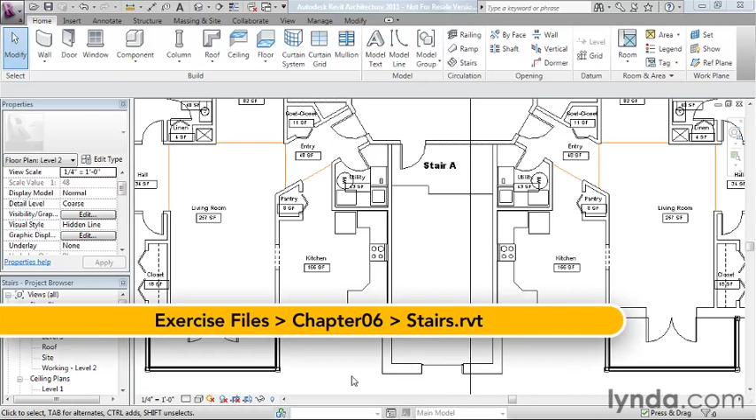Stairs are among the more complex of our sketch-based objects. You sketch a plan representation of the stair, and from that sketch, Revit builds all the model geometry necessary. The sketch lines are color-coded to indicate their different functions. So the riser lines are black, the boundaries are green, which indicate the edges of the stair and also indicate any stringers you might have, and there's a blue line that indicates the path of the stair.

With the Run tool on the ribbon, you can quickly draw all of these elements with just a few clicks. Sometimes stairs can be a little tricky, but with a little practice, you'll get the hang of it. So here I am in a version of the condo file. The file's called simply Stairs in the exercise files folder.

And we're going to go ahead on the Home tab and on the Circulation panel, click the Stairs tool. This will take us to sketch mode. We'll see a lot of familiar tools and a few that are unique to the stair. Now the first thing I'd like to point out is stairs have fewer shapes. We either draw them as straight or curved, and you'd use curve if you're doing like a spiral stair or something along those lines. And we're going to stick with straight stairs in this case.

Now I'm going to do a pretty typical switchback stair here in the stair tower. So it's going to go up half the risers, and then it's going to turn with a landing and go up the rest. Before I start clicking and sketching, when you're working with stairs, it's very important that you check the properties first. Now the first properties we want to talk about are the levels. And I want to just verify that I'm starting at level 2 and I'm going up to level 3.

And the reason this is important is if I click the Edit Type button right here and scroll down, the type in this case is called 7-inch maximum riser 11-inch tread. And what that means is exactly what you see here. The minimum tread depth of this stair is 11 inches. The maximum riser height is 7 inches. So we can do a smaller riser and we can do a bigger tread, but we can't exceed these two limits.

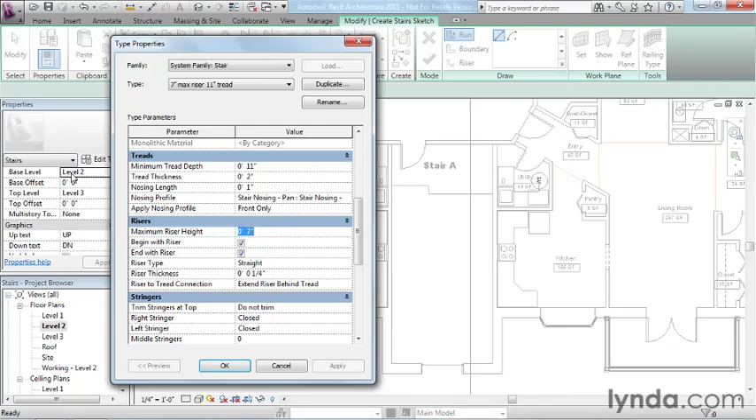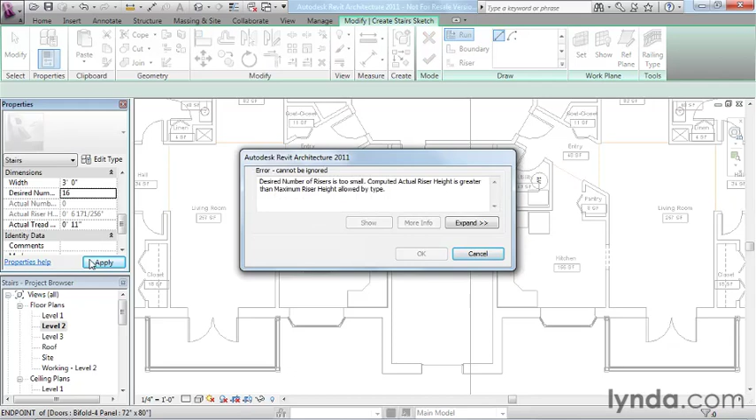So Revit's going to take this number here, this 7 inches, and it's going to look at the distance between these two levels, and it's going to figure out how many risers we need. And that's going to be controlled down here. So if we want to try a different number of risers, we can do that. Like I could put in 16, for example, but if I try to use that number, Revit will complain and give me an error message. It violates the rules, basically, that I just showed you. It doesn't work with a maximum 7-inch riser.

So 18 is basically the limit. And as you can see here, that gives me an actual riser height of nearly 7 inches. That's as close to 7 inches as you're going to get without going over. Now, the other thing I want to look at here is the overall width of the stair. I actually want my stair to be a little wider than the default 3 feet, so I'm going to increase that to 4 feet. And again, you can edit that later, but it's easier to just do it ahead of time.

Now, the next thing is I don't typically try to draw my stair in exactly the right location. What I typically do is just kind of click in a convenient open space and start drawing. And what I would like to point out to you here is it's a little difficult to see, but there's this gray piece of text following my cursor. And right now it says 11 risers created, 7 remaining, and then it says 12, and then 13, and so on. This is telling you how many risers you have.

So what I want to do here in this case, because I'm doing a switchback stair, is I'm actually going to back up here to where it says 9 risers, because I know I've got 18 total. So I want to use up half the risers for the first run of my stair, and then I'm going to click my mouse. Now, I mentioned the color coding. You can see it here. The green lines are your boundary. The blue line is your path, and these black lines are the risers themselves. Now, let me zoom in just a little bit closer.

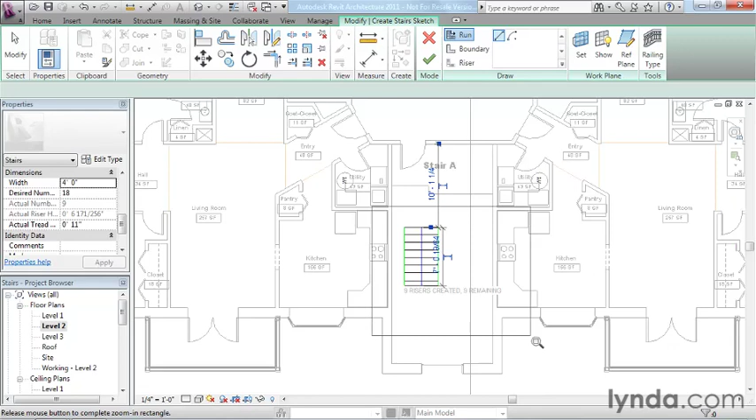And to create a landing, we don't actually draw the landing. Revit will do that for us. All we need to do is indicate where we want the next run of the stairs to start. So I'm going to kind of come over here and click. And then you'll see the little message telling me how many risers I have left.

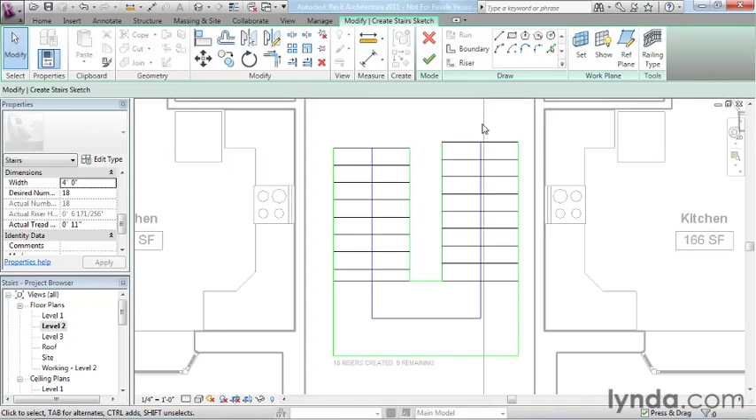As soon as I click past that rectangle, you can see that I've used up all 18 risers and there are 0 remaining. And I'm going to click again. And not only do I get the rest of that run of stairs, but Revit also goes ahead and fills in a landing for me. Now you can make some modifications to this sketch after the fact. I'm going to zoom back out.

The most obvious modification that we want to do is actually relocate it because it's just sort of floating in space right now. So the easiest way to do that is just kind of move it around. So I'm going to select the entire sketch with a window, click the Move tool, pick the endpoint snap right here, and snap that right to that endpoint there. So that'll kind of get me started in the right location.

But the next thing I want to do is I only want to move this half of the stair. So I'm going to make another window selection like so to highlight just that half of the stair. And that's all I want to move. Now I could use the Move tool again for this, but I actually don't want to snap it right to any geometry that I have conveniently nearby. I want it to be an offset off of this wall.

Now, I could do that really easily if I had some temporary dimensions, but they're not displaying. Turns out that we've got this button right here where we can force the temporary dimensions to display simply by clicking on that button. And now I have all the dimensions I could need to go in and tell it exactly where I want these sketch lines to move over to. So I'm going to edit that value right there, and I'm going to make this 4 inches. And that's going to pull everything over there and basically lengthen the landing.

One last modification if I want is I could make the landing a little deeper. And again, you'll see that that's perfectly fine. So whatever modifications that you need to do. Before I get out of here, I just want to verify Revit will create railings for us automatically as a convenience. It's not required, but it does it.

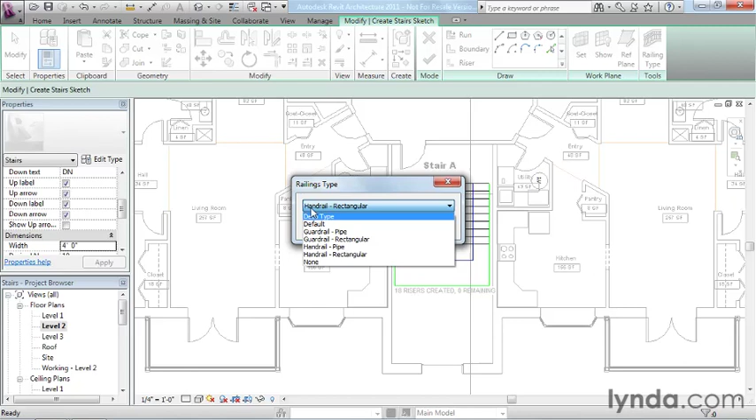I'm going to click the railing type and just verify the type of railing I have. You might have several choices, so you want to kind of choose the one that you want. And I'm going to stick with the default rectangular handrail. And then I'm going to go ahead and click finish. And what you'll see is we've created the stair.

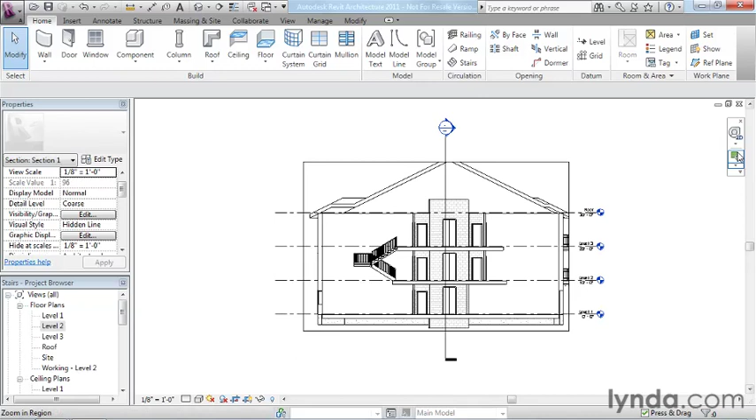And not only that, but it's given us some railings on each side of the stair and drawn it there in plan. Let's take a look at it in section. You can see it there in our section. And now we could mirror and copy that around elsewhere in the file. So there you have your stair, complete with railings.

You can repeat the same process to create other stairs, like for example down here in the main lobby, we can do a straight run stair running up there. All you need to do in that is just use the run tool, click, and use up all 18 risers in 2 clicks. And for other floors where you have the switchback stair, you could just simply copy the one we have around. Okay, so in this lobby here, I might want just a simple straight run stair.

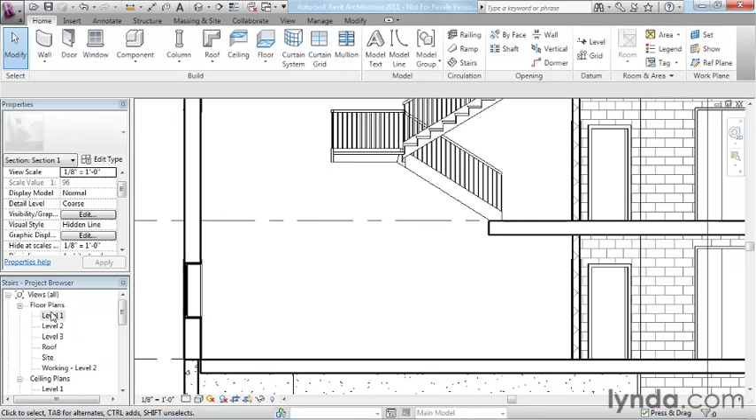I'm going to return to level 1 here in the lobby. And the stair should remember most of the settings that I already had configured. So we'll just verify that. We're going up from level 1 to level 2. It's 4 feet, it's 18 risers.

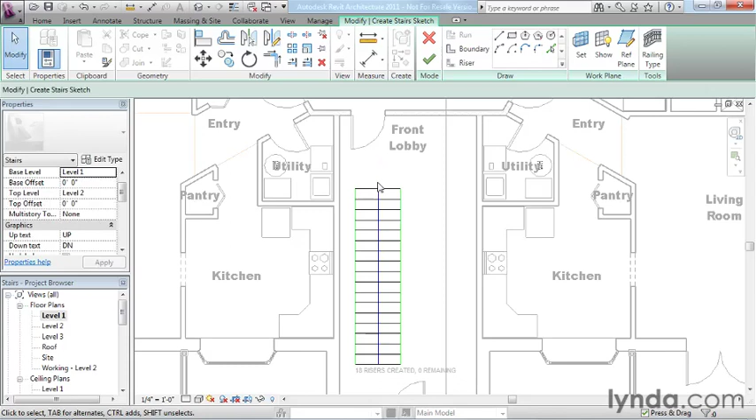So all I have to do is click, and this time click all the way to the end, use up all 18 risers in a single run, select the entire stair, activate the dimensions. We'll place that at 4 inches, and we'll go ahead and click finish. And there we have our second stair. Zoom out, take a look at the section, and we do have to nudge it over a little bit to make it meet up with the floor, but I think I'll leave that to you as an exercise.